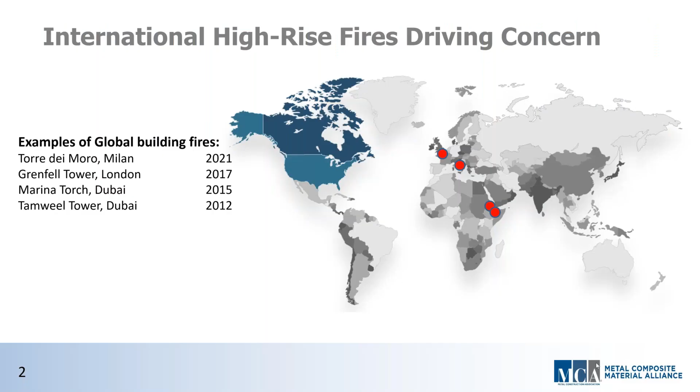The next question that comes to mind: what brought this conversation to have a webinar on cladding safety in light of global fires in the first place? Too many global high-rise fires, just to mention a few: Tamweel Tower in Dubai, Marina Torch in Dubai, recently the Torre dei Moro in Italy, and of course we all know the results of the Grenfell Tower in London. None of these wall assemblies as installed would meet North American building codes. In other words, we're not just lucky in North America. Luck isn't really needed when you're working hard, doing the right things.

Our MCM industry is a growing one, and one of our missions is to help educate the construction industry on what our testing has done to earn that trust. There's a lot of value for an MCM facade, and it comes in many different ways: design versatility, which architects are using every day—it's an amazing product. Its functionality as a lightweight and flat material feeds into that design versatility. And the testing behind it—we have tested this material constantly over the last 40 years.

The purpose of this webinar is really to understand the value in the North American building codes—more specifically, the value of the NFPA 285 multi-story fire test and its overall performance of a wall assembly in the real world. The NFPA is all about safety and no threat to life, and the NFPA 285 tests construction wall assemblies containing combustible materials for real world applications.

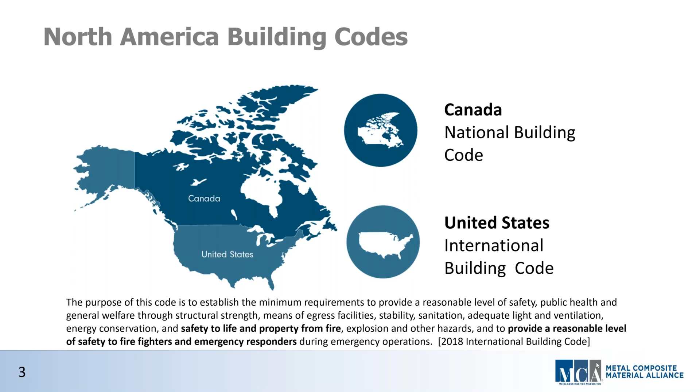Let's get to today's AIA HSW credit learning objectives: what does the NFPA 285 tell us about cladding performance; understanding the relationship of materials in that wall assembly for cladding performance—they all tie together; when the 285 actually applies per the International Building Code requirements; and why engineering evaluations are a great alternative to an actual test.

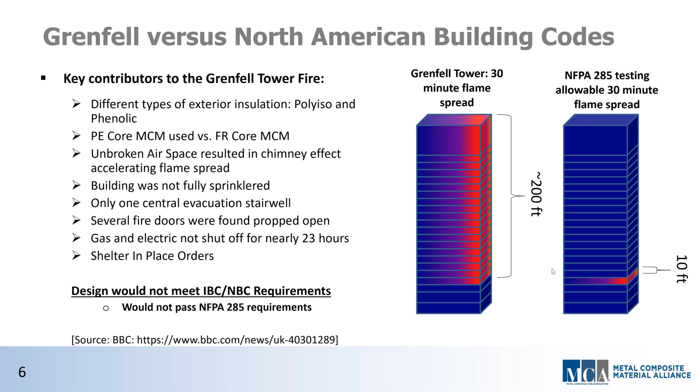Nick, 3A Composites manufactures MCM panels.

Can you speak to the PE core material? Is it specifically still available in the North American market? Yeah, Paul, that's a great question. So the PE material is still manufactured and available in North America, but it's primarily used for signage and canopies, and it does still meet the code requirements on low-rise buildings under certain conditions, so that is true.

That said, most manufacturers such as 3A primarily produce flame-retardant materials, and this is the predominant material used for commercial construction due to the fact that it meets the North American building codes, specifically NFPA 285, or S134 in Canada, respectively. We really encourage the market to design with the FR material and FR core because it helps reduce any risk should there ever happen to be a fire.

Now, you say, should there ever happen to be a fire? Have there been significant fires with MCM in North America? Yeah, that's a really good question. As Andy stated, none of those international fires would have been able to happen here in North America, and they wouldn't have met the North American building codes.

So when I was first asked to be part of this panel, I had my team do research to find out if we could find any examples of fires in North America that had flame retardant materials on the facade, and how they fared in that fire, just so we could speak to it. We were able to uncover 4 fires in total, and they're here on the screen. One in Virginia, one in Ohio, and 2 in Vancouver.

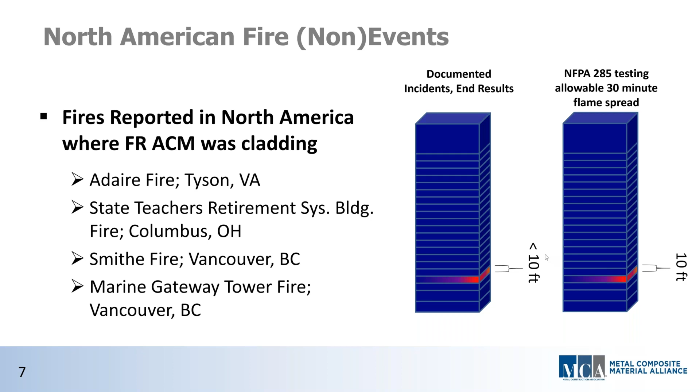Thanks, guys. You make some great points, and it seems like NFPA 285 is a major key to understanding why North America hasn't suffered these catastrophic fires. Andy, turning to you on the codes, is this code the same for both Canada and the United States? Is it the same for every state, every city, every municipality?

Well, that's a good question. With regard to fire, the intent is the same, which is to limit the flame spread up the outside of the building. In the United States, as has been mentioned several times, NFPA 285 is the large scale test that's used. In Canada, you've got the ULC S134. There are differences between the 2 tests, but at the end of the day, it's all about flame spread on the exterior.

Another common thing about the codes in the United States and Canada is, generally speaking, the codes are adopted across the entire country. Each state or province adopts that nationwide code, and they make some changes in it to address specific considerations or concerns in their area.

To make things even a little bit more confusing, though, major cities like Toronto, Los Angeles, Chicago, New York have local issues they have to address. These are referenced as local amendments. For example, in New York City, the proximity of high-rise building to high-rise building makes them look at things a little bit differently. But the bottom line is that flame spread over a building or between buildings remains the major concern. Thanks, Andy.

So as I'm understanding this, the code's different in Canada, but the S134 is a similar test to the NFPA 285. Its requirements by state and city may differ slightly, but the NFPA 285 is the most common requirement. For the sake of this presentation, we're going to focus in on the NFPA 285.

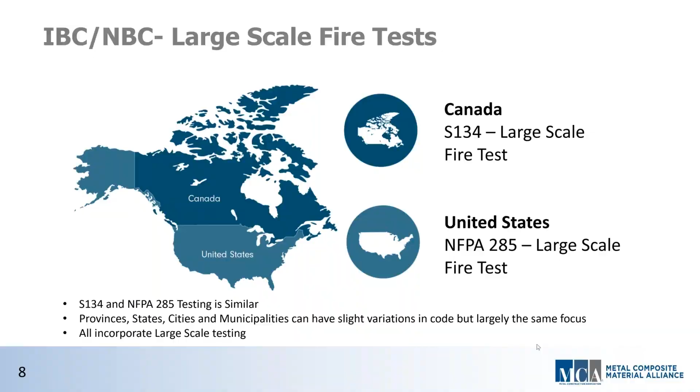With that in mind, Dan, can you tell us a little bit about the history of the NFPA 285 and cladding performance? In reality, how much time do we have here? Because honestly, it could take me a day, a week to sum up everything we've learned over these last 40 years, let alone try to fit it into this presentation.

But if I could define the work that's been done and what we've learned, it's been a massive undertaking by everyone over the last 40 years. Architects, manufacturers, testing labs, engineers, building owners, developers — we've all worked together to make sure we have good, safe products out there that meet the code. We've done thousands of tests with thousands of different combinations of exterior wall assemblies over these last few decades, and all this testing has really left us with a strong understanding of fire performance and flame spread of exterior walls and how those materials burn.

So Andy, what's the NFPA 285 tell us about cladding performance? Well, the 285 gives us a real world, at least size-wise, sample for a fire test and shows how the components, but more importantly, the overall wall assembly performs. NFPA 285 is about more than just the cladding. Items like combustible insulation, the geometry of the assembly, the depth of the air cavity, even the weather-resistive barrier can change the performance of the wall, and they're all included in the overall evaluation.

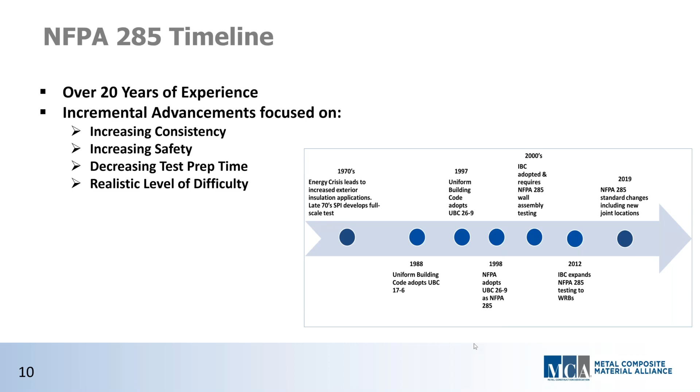Thanks, Andy. You mentioned the word combustible. Dan, you have referred to combustibility a couple of times. It might be helpful for us to understand that word a bit more, as it can kind of have a scary connotation. Dan, what does combustibility mean when it comes to building materials and the IBC code language?

So, Paul, interestingly enough, the good book, the IBC, actually does not have a definition for the term combustible. You go to the definition section, it's not there. So therefore, we've got to go to Webster's dictionary, and that's where we get our definition. But in terms of determining if a material is combustible or non-combustible in the eyes of the IBC, we go back to ASTM E136 or ASTM E2652. Those are the 2 test standards that are used by the IBC to determine if a material is combustible.

Will it burn? Will it ignite and combust and generate flames? Ultimately, if you fail ASTM E136, you are considered a combustible material in the eyes of the code, unless you meet certain exceptions in IBC. One of those examples is gypsum wallboard.

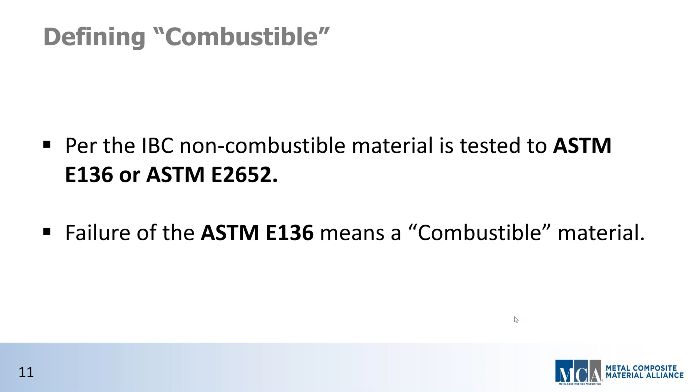Yeah, that's correct. We've got them everywhere - the clothing you're wearing is combustible. But they're not all the same. They don't even each have the same amount of flame propagation potential. All materials are not the same, they all burn a little bit different.

Flame propagation and combustibility are two completely different things when you're trying to evaluate a material. Every material ignites and burns differently, and we need to evaluate it that way. In some instances, the combination of two different combustible materials will result in a flame spread completely different than if we burned those materials by themselves. A single burning item will have a certain amount of flame spread, but as soon as we add a second combustible material, plus geometry, air gaps, angles, that will completely change the fire performance and flame spread of those two materials burning together.

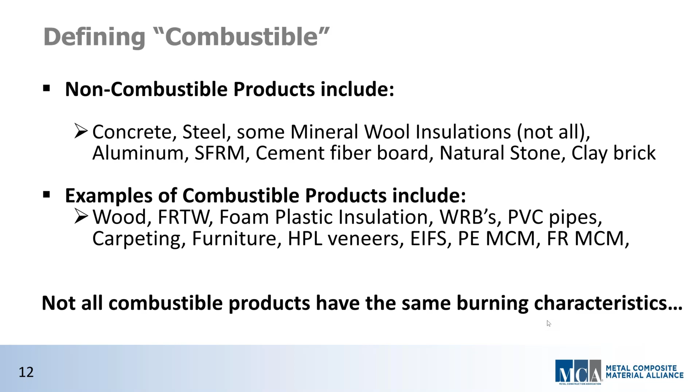Thanks, Dan. Nick, let me turn to you. Your company manufactures MCM, and in particular 3A produces Alucobond Plus, which is FR. Explain what the FR means and how it's different than the PE that's been used in the fires we've seen so far.

Yeah, no problem. So first off, FR stands for fire or flame retardant, not fire resistant, which is commonly confused, but it's an important difference. The flame retardant core not only burns more slowly, it actually retards the flame due to how the core is made.

So how is it made? What's the composite that causes this fire retardant characteristic? Yeah, so I'm not a chemist, but on the screen here I think it will help me and everybody in the audience know what I'm speaking to. Manufacturers of MCM use different minerals and different proprietary cores, but primarily there are two main fire and flame retardant minerals that get added to the core.

The one that's commonly used is alumina trihydrate. The other one is magnesium hydroxide. When these minerals are exposed to extreme heat, they break down and release water vapor and some gas. Fortunately the gas is non-toxic, and the water vapor helps suppress the fire, allowing the material to self-extinguish once the flame source is removed. As soon as you take the match away from the material, it will immediately go out.

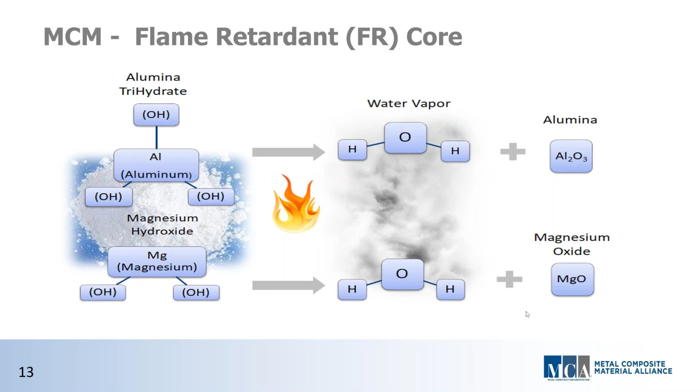Thanks, Nick. So we've been talking about the NFPA 285 test quite a bit here, mentioned several times already. I think it's going to be beneficial for us to get into this testing procedure a bit more. Dan, we're going to come back to you - let's start with the basics. What does the NFPA 285 determine?

NFPA 285 is the standardized fire test method for the US and IBC, and it helps us determine vertical and horizontal flame spread on exterior walls that contain combustible components. Like I said before, we're evaluating flame spread - now in a couple of ways. We're looking at it across the face of the wall, and within the wall cavity in spaces we can't see. We want to ensure we don't have flame spread from floor to floor within the building via the exterior wall.

So limit-wise, the maximum flame spread allowed is vertically 10 feet above the window or wall opening, and laterally on the test apparatus it's 5 feet to either side of the center line - so 10 feet up, 10 feet wide, 100 square feet is your maximum fire size here. The key word to emphasize is assembly. This is an assembly test, not a component test, and it's right there in the title of the standard - we're looking at all the components together.

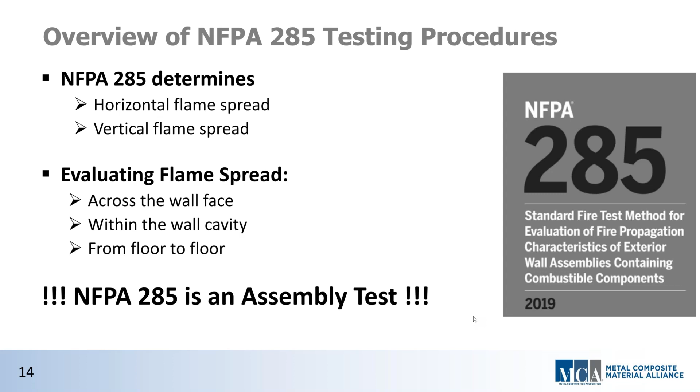Thanks. How's the test set up, Dan? So the 285 test is a multi-story apparatus. We have two levels involved, the lower level being the burn room, the interior fire that we're trying to simulate - a fully developed fire, or what we'd consider a post-flashover fire, where we'd have a fire plume breaching through the wall opening, and we achieve this via two burners for safety reasons in the lab.

We have the burner in the room, and then we have an exterior window burner, and we're exposing the interior face of the wall and the exterior face of the wall to fire at the same time. The test assemblies themselves are built into a frame and can roll into place against the face of the test apparatus, allowing multiple tests to be run with minimal downtime. We can prefab these walls, roll them in, roll them out - we just have to let the furnace cool.

And these tests can be quite smoky, so when it's smoky in the lab, we're trying to look at flame spread in concealed spaces too. So how do we do that? We've got thermocouple measurements, or temperature measurement devices, within the wall assembly, on the face of the wall, inside the wall, at several locations within the assembly, and in the room above the burn room. We're looking at temperature readings, and based on the standard, we have temperature thresholds like 1,000 degrees Fahrenheit.

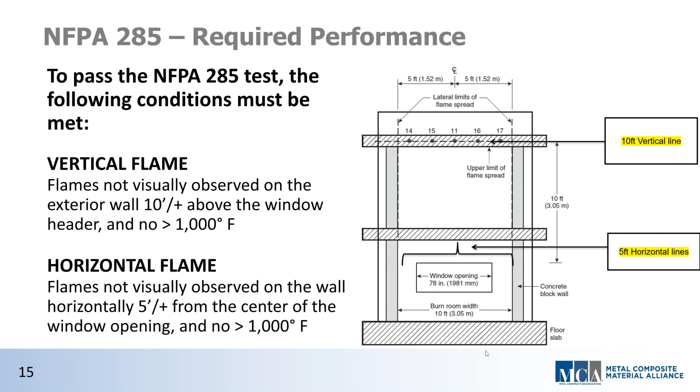You mentioned that this is a 2-story test. So how is the second story involved in the pass? Yeah, that's correct. So as I said, we're looking at flame spread vertically within the cavity and then from floor to floor. The IBC's intention is to ensure building safety and life safety of the occupants, so we want to make sure that people on the floor above aren't exposed to flame, heat, or smoke.

So there's a couple ways a fire can get into the floor above: at the slab area where the wall interfaces with the edge of slab, you can get fire that breaches out the window, burns up the face of the wall, and tries to breach back through the entire cross section. Or you have fire that gets into the wall cavity and then breaches through to the interior. So there's temperature measurements and video cameras in that second story to make sure the fire isn't burning through the wall and getting to the floor above.

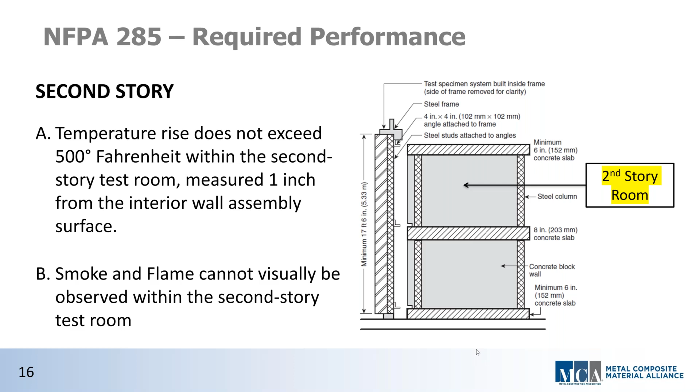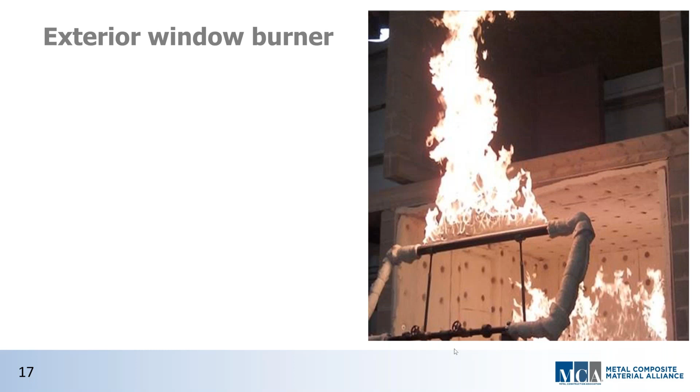So when we're doing this test, we're evaluating the exterior wall assembly as a whole, not as a singular component. We're looking at everything from the interior wallboard all the way out to the veneer system and everything in between. When you burn a single material, it'll behave in a given way, but as we start to burn multiple materials together in a specific configuration, that flame spread and burning behavior will dramatically change. In a product test, the only material burning is itself.

So running a 285 test, for example, on a single combustible item like an MCM panel on a gypsum base wall—gypsum, stud, gypsum, nothing, MCM panel—that's only going to give us the performance of the MCM. But when is the MCM panel going to be the only combustible in the assembly? What about the water resistive barrier? What about our continuous insulation requirements by the energy code? Just having an MCM panel-only NFPA 285 test doesn't really give us an end-use assembly to determine if it's NFPA 285 compliant or not. So the test has to be conducted with all the exterior wall components involved.

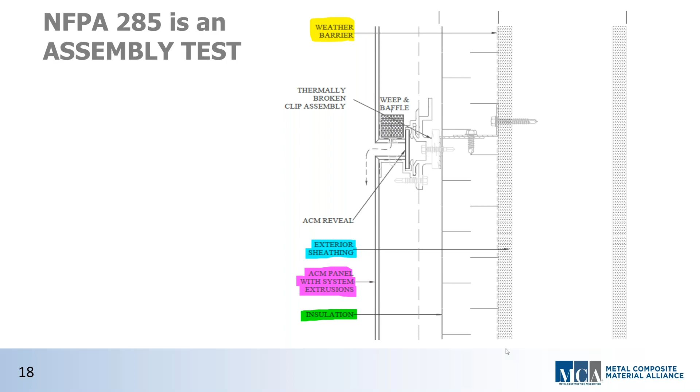Great, thanks, Dan. I think it's probably helpful for us to see one of these tests at this point. Nick, I think you have a time-lapse video that will take us through the test from beginning to end. Let's cue that up. Nick, would you talk us through what we're seeing? Yeah, absolutely. I think it's very helpful to see one of these tests for anyone in the audience who hasn't had the opportunity to witness one. It definitely helps you understand how intense this test really is.

So right here, before we begin, just to understand what you're looking at, just like the images that Dan was covering recently—this is a 2-story-high test, and you can see here in the front that opening window.

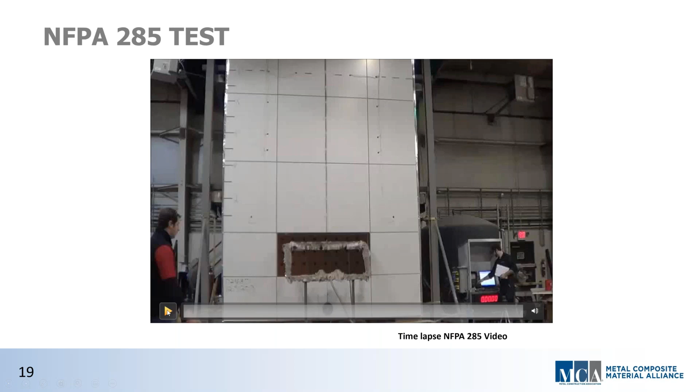What you see behind there is actually that big open room space where the fire is, and then you have the burner on the outside of the window. So this is going to take us through 30 minutes plus a 5-minute cool down of the test afterwards. It's just going to be sped up so that we can watch the whole thing happen very fast, but it's going to be continuous. So go ahead and start the video.

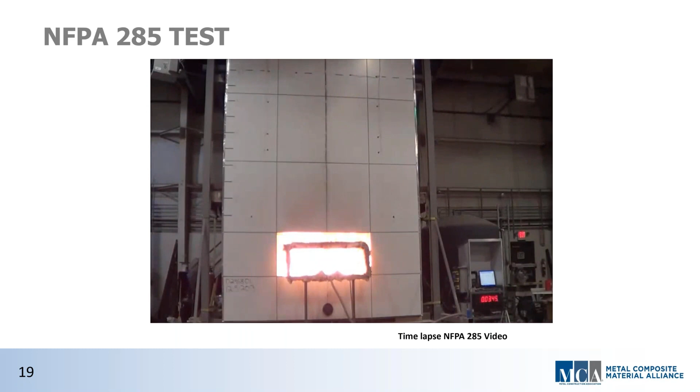You'll see here, they light the interior, so that interior room is heating up to 1,000 degrees, lots of flame there. And here in a moment, you're gonna see it flame up really high, really suddenly. What really happened there was they lit the outside burner, pumping gas through there, increasing the BTUs throughout the entire test to increase the intensity of the fire, because that really simulates a real life situation.

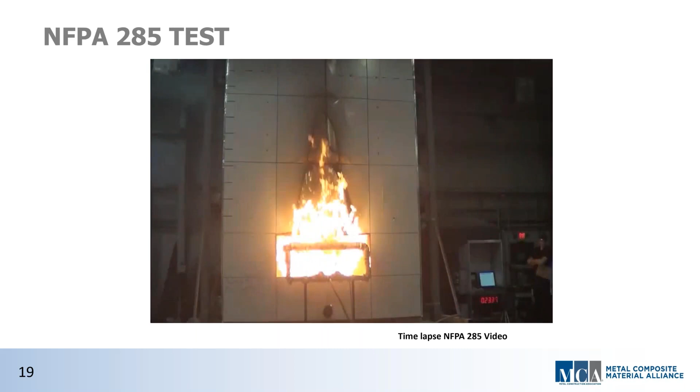You can see the flames reaching up as high as 6 feet. And as Dan mentioned, even if there was nothing but non-combustibles on the wall, that's how high the flames reach. So it's actually melting and slightly burning some of the core, but melting the aluminum out of the way as the test carries on. And again, they're actually adding more and more heat, more fuel to this fire as the test is going on. So here shortly, we'll hit the 30-minute mark.

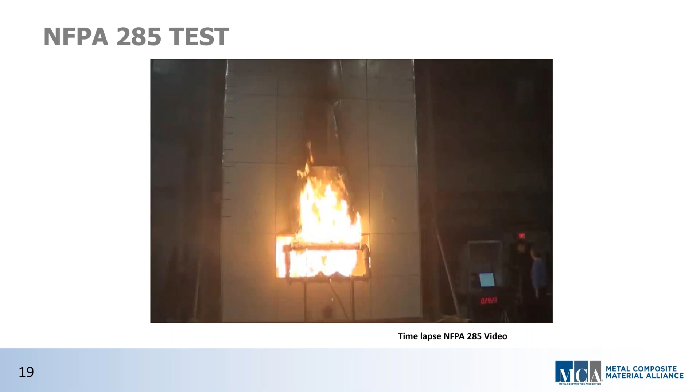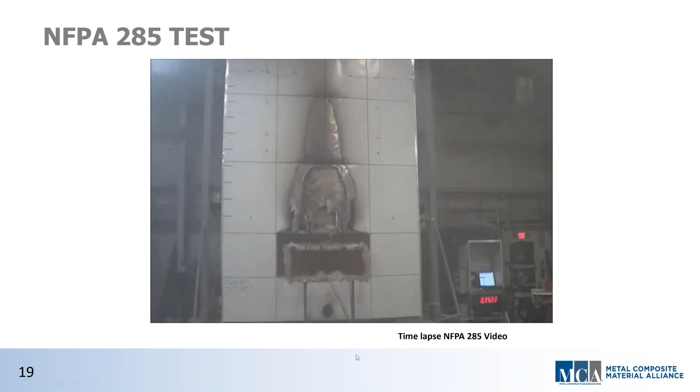And you'll look at this here, and right there, they actually turned off the gas. So what's really important to notice at this point in time is there's no fire extinguishers, there's no sprinklers. All that happened was the flame source was removed, and the material responded exactly as it was designed to. Its FR property actually caused it to self-extinguish without anybody having to address it with something such as a sprinkler. So this was a successful pass of a test. As you can see, it's an extraordinarily intense test, and the material on the wall performed exactly as we would expect it to.

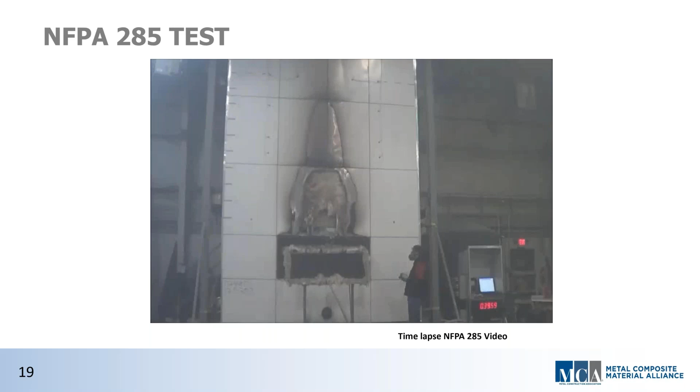Dan, so it's an assembly test, but the individual components of the wall matter. Tell us about the weather-resistant barriers and the insulation. How can the selection of these materials impact the NFPA 285 testing? And in particular, are they all pretty equal, or does the particular type of material chosen matter?

Yeah, so for starters, there are several different types of water-resistant barrier manufacturers and products out on the market, and the same holds true for the insulation materials. These materials traditionally cover the entire wall assembly, and it can account for a large amount of the combustible material within the wall assembly itself. Now, just because they're not visible from the street doesn't mean that we can ignore them completely. They all physically burn differently, and they all have different intensities of burning.

You can get water resistive barriers as fluid applied, so it's kind of sprayed on or rolled on with a paintbrush. You have the self-adhered sheet goods, and you have the mechanically fastened sheet goods with staples or screws. Based on our in-house cone calorimeter testing, we know that the fluid applied materials tend to burn a little bit longer because they're thicker, and they burn a little bit hotter. They've got more beef to them when it comes to their combustible components, and they have more potential energy than the mechanically fastened sheet goods.

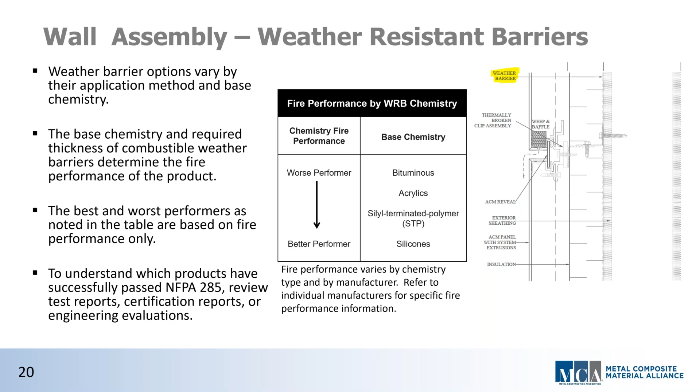So usually when we're conducting a 285 test and we're trying to extrapolate data later on in an engineering evaluation, which we'll cover later, we want to test with a highly combustible material that has a lot of potential heat involved. So from an insulation standpoint, we're kind of looking at the same thing.

The insulation's a little bit different. They vary from spray foams, EPS, XPS, polyiso. You don't see a lot of phenolic foams here in North America, but then you also get the mineral fiber insulations. So some of those materials, when they're heated and burned, they'll melt, they'll drip, they'll ooze. Some other materials will burn slowly and create a char layer, a little bit of a crust to it. And then you look at the mineral fiber insulations that'll just slowly decompose as they burn.

But based on our years of testing at Jensen Hughes, we know that specifically with MCM panels, spray foam, EPS, and XPS foam insulations do not work behind MCM panels. So if you give me a call and say you're going to use spray foam behind the MCM panel, I'm going to tell you to save your money. You're not going to pass the test.

Thanks, Dan. That's a lot of really helpful information. Appreciate it. So, kind of switching gears now, I'm wondering, how do we know when testing is required? Nick, can you help us understand what triggers the NFPA 285?

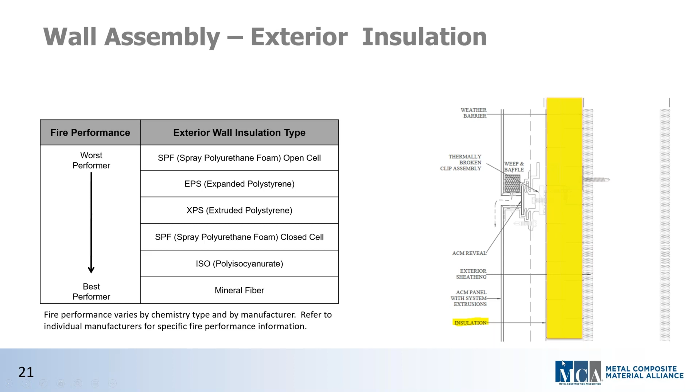Yeah, Paul, it can often seem quite confusing as you go through the code. NFPA 285 is actually referenced in two different sections of the code. One is in chapter 14, for facades. The other is in chapter 26, for insulation. It kind of references back and forth and can feel like a bit of a maze, but there are a few easy questions you can ask yourself when designing a building or wall assembly to get you going in the right direction.

Thanks, Nick. Yes, as the MCM fabricator, one of our jobs is to ensure that the wall assembly meets code. The first parameter to consider is construction type. If it's non-combustible construction, that's types 1, 2, 3, or 4, then NFPA 285 must be considered.

Next, I look at what's going on behind the MCM system. Is there insulation outbound of the sheathing, and if so, what type? If it's a foam plastic insulation, as Dan alluded to a couple slides ago, then an NFPA 285 is required. If there's no insulation outbound of the sheathing, then I look at the height of the building. Simply put, if the building is 40 foot or more above grade, then NFPA 285 is a requirement.

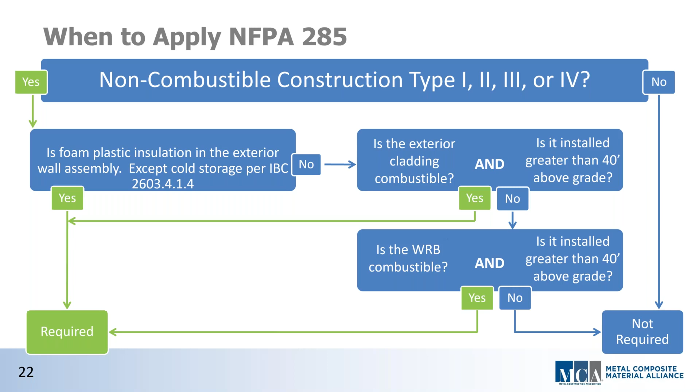So we've covered the NFPA 285 in quite a bit of depth here. Jeff, are there any other building code requirements related to fire for MCM cladding? There is, Paul. ASTM E84, often referred to as just E84, is a standard test method for assessing surface burning characteristics of building products. It's a test that's been around for decades, and it measures both flame spread and smoke developed of individual components used in a wall assembly.

The results of this test classify a material as either class A, B, or C. Class A material is required for high-rise construction, and materials that do not meet this classification often have difficulty passing NFPA 285. The downside of E84 is twofold.

The test is horizontal, and we know that critical performance is determined when the material is in a vertical orientation. The test is done on individual wall components, and again, as mentioned earlier, there's no way to determine fire interaction of individual components using this test. So again, we look to NFPA 285 as a great test to determine the performance of the wall assembly.

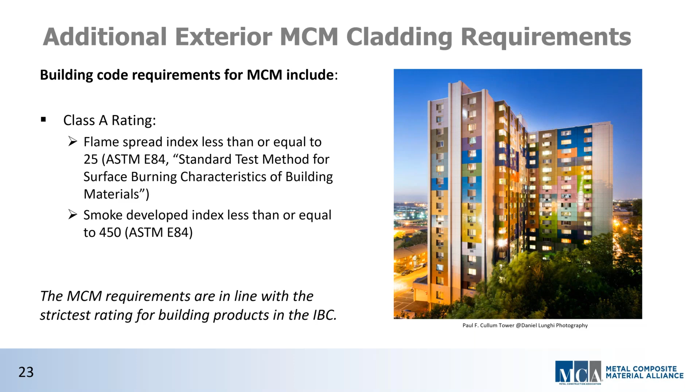Thanks, Jeff. So Andy, I want to come back to you. You've been in the industry and part of the MCA for a number of years. What has the MCA and the MCM Alliance done for the safe use of MCM?

Well, Paul, both the MCA and the entire MCM industry are really focused on performance and safety. Probably the best example I can give of changes implemented because of the MCA and the MCM industry goes back to the initial IBC code in 2000. When we first wrote that code, there was a section called alternate conditions, and there were some exceptions to the use of NFPA 285, very limited exceptions, limited in scope, limited in the spacing, mostly used for things like signage and that type of thing.

But that was in there, and it allowed the use of MCM, the PE core MCM, above 40 feet above grade. After 15 years in the code, this section still proved to be a problem for architects and designers to really adhere to and get the intent correct. In the development of the 2018 International Building Code, MCA proposed that this section be removed, even though we were the ones that got it there in the first place. The change was very welcomed, and that change took place in the 2018 code.

So those allowances above 40 feet were no longer there unless you had a 285 test. Another development by the MCM industry that started back in the 1980s was something called an acceptance criteria for MCMs,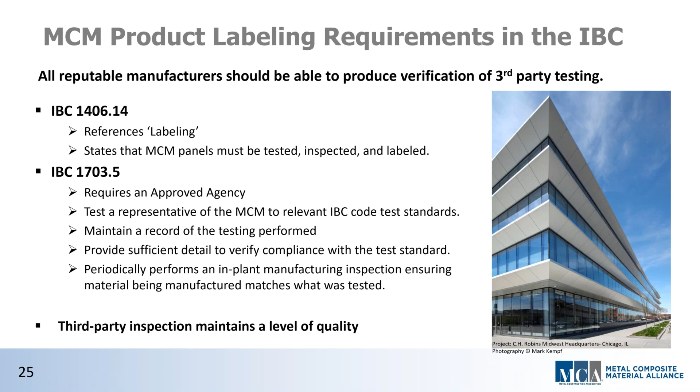Nick, the other thing that Andy mentioned was third-party testing and code compliance reports. Take us through why they're important, if you would, please. Yeah, so again, per the IBC chapter section 1703.5, third-party inspections are required, and that's really there to maintain a level of consistency. I look at it as the old saying, trust but verify. The third party visits your plant annually, and they evaluate that the material you're producing is the same as what you have tested. Sometimes you have to change a component of your material for various reasons, and that third party is there to evaluate that your material would still meet all of the same approvals and building code requirements.

And sometimes when you change something that may seem small or insignificant, you might still have to retest all your materials due to that small change. It really helps ensure the market is receiving what you're promising. An example of some of these third parties are like the ESR code compliance report, the ICC ES reports that many of us are very familiar with. Intertek does these as well. And again, they're really there to make sure that we're giving you what we are promising.

Well, it definitely seems like a good thing for manufacturers to produce what they've tested. So I'd like to switch to another topic now.

I would like to touch on pass or approved wall assemblies. Does every wall need to be tested? And this seems kind of impossible, Dan, given all the different potential designs.

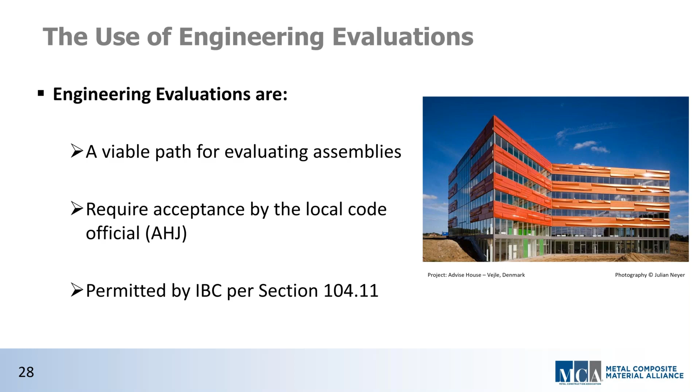Thanks, Dan. So this is my last question before we get to our audience's questions, and it's a summary. What's the one major takeaway for trusting the NFPA 285? I'm going to turn this to each of our panelists.

Let's start with Andy. For me, the one issue that I'd like people to remember is that NFPA 285 has been used for decades in the United States to show wall performance when exposed to a fire inside the building. This performance standard has proven to be very accurate, and we have not seen any major fires involving assemblies that have been tested. Could we choose a more difficult standard? Of course. We could add more fire, make a bigger sample, run the test longer, but we have no experience that makes us concerned. We know that the exterior wall performs like the tested assembly, so it's a good indicator for high-rise construction.

Nick, let's have you go next. What's your major takeaway? I think it's really important to see that the major fires driving this concern—there's a right to have concern—but they're not representative of how we build in North America. Our codes, as Andy was just saying, are working as they were intended to drive safety, and we're all here to help you and anyone else meet these codes if you have any questions.

So if you need assistance, please reach out to your local MCM sales representative or your local trusted fabricator, or even contact the MCM Alliance directly. We said that several times throughout the call. That's what we're here for. We're really focused on making sure that buildings are built correctly into these codes. We know it can seem confusing or difficult to navigate, so just reach out and get assistance, and we're there to help make sure your design meets the code that was intended for this life safety.